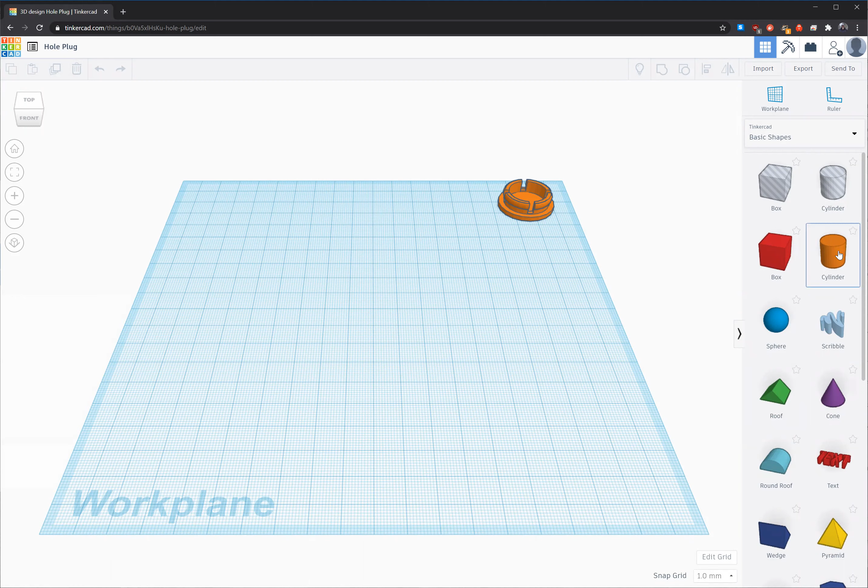Our hole plug is going to be 7/8 of an inch, so we're going to make the top of it a little bit larger, about 27 millimeters. Then the base is going to be about 2 millimeters thick. Since this is the only thing touching the build plate, we're going to move our work plane up to make it a little easier.

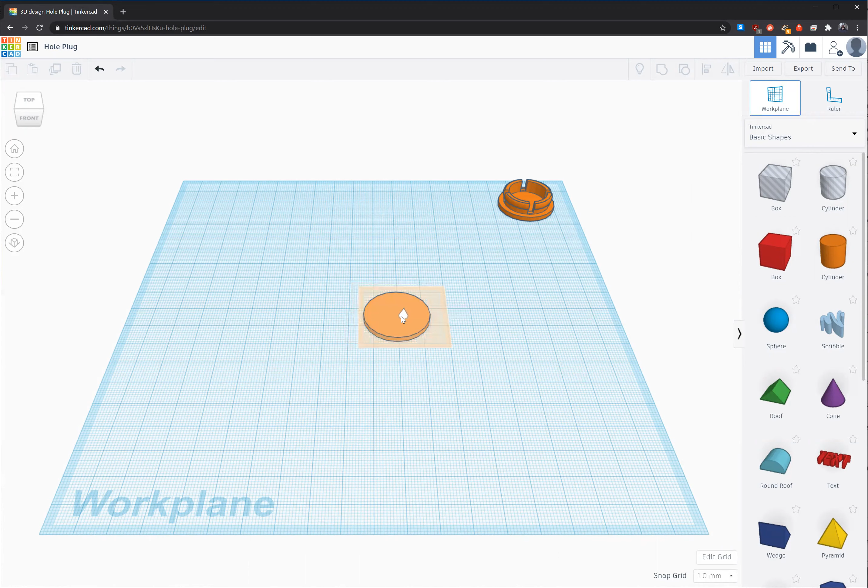The next cylinder, and then we're also going to do a top-down flat view. Zoom in there. The other thing we can do here is make the sides nice and smooth.

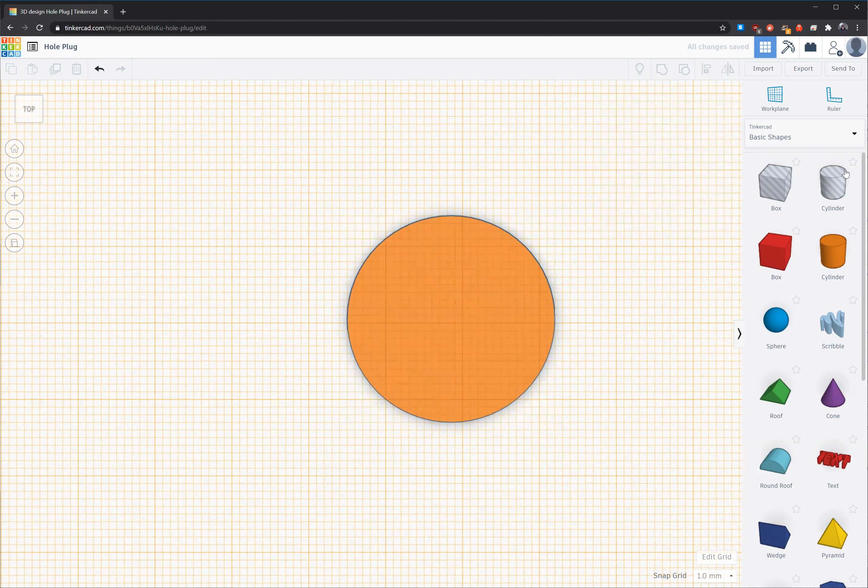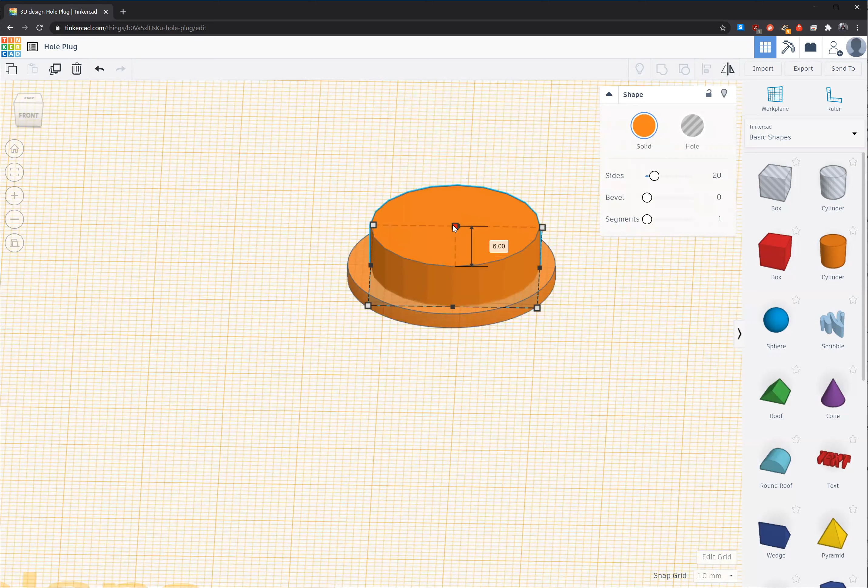Next thing we're going to do on our work plane is the next cylinder. Put it on there, we'll line it up in a minute. This is going to be just a little bit smaller, 22 millimeters. If we want to look at it, make it about 6 millimeters tall. We'll go back to the top and line it up.

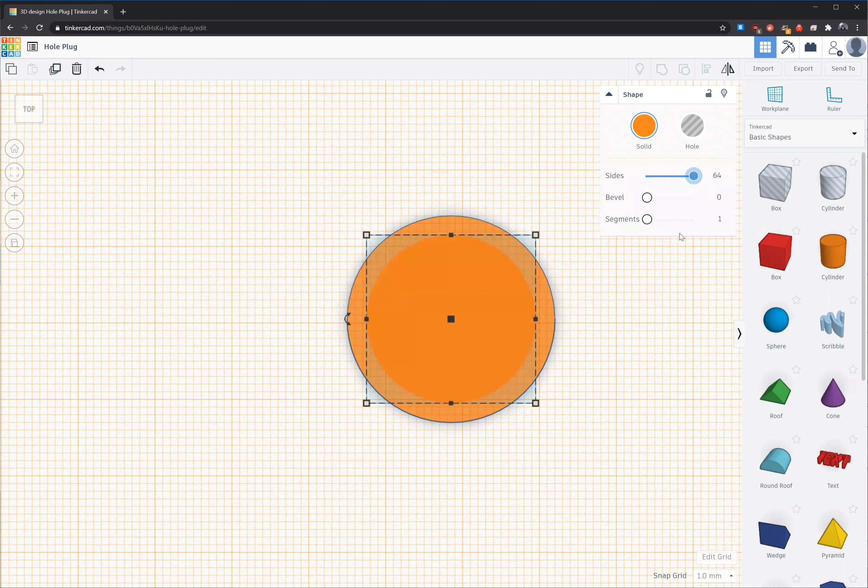Select all, line. I'll make that one smooth also. We need to make that second one hollow, so we'll do that with this cylinder. Get it up again, make it smooth.

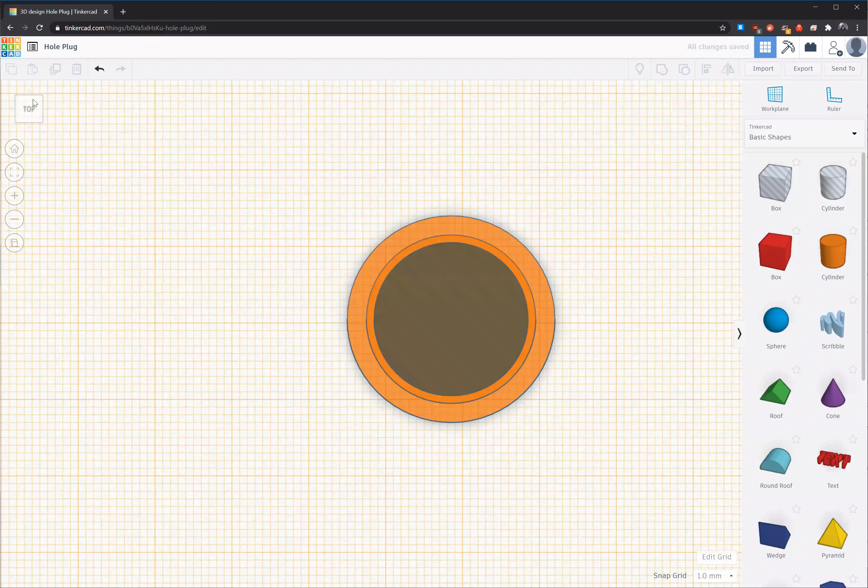Select all and align. Let's take a look at what we got. We can actually shorten that up, but it doesn't really matter because we're going to join them right now. So that's the general shape, we got that together. We're going to select all now, and we're going to join.

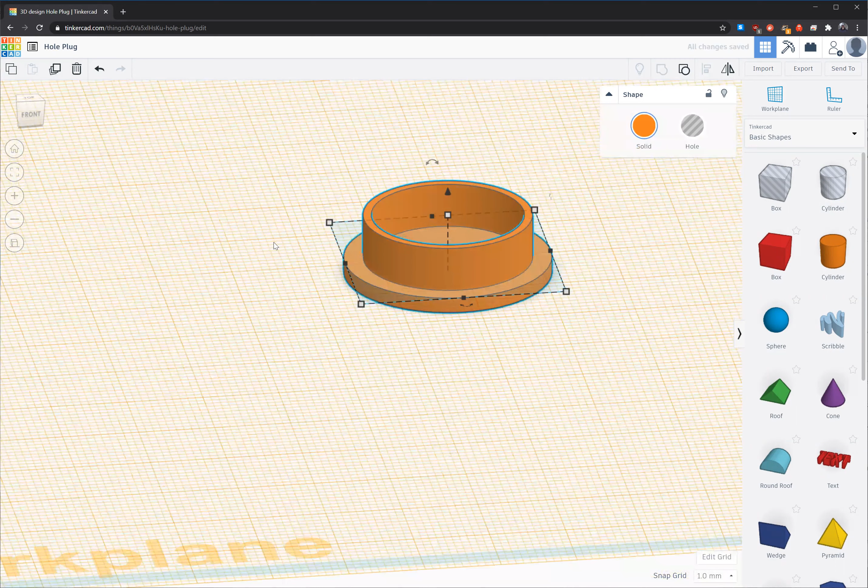So it's starting to look like a hole plug, but we do need a lip on top so that we can make it pop in the hole. So we're going to use this ring.

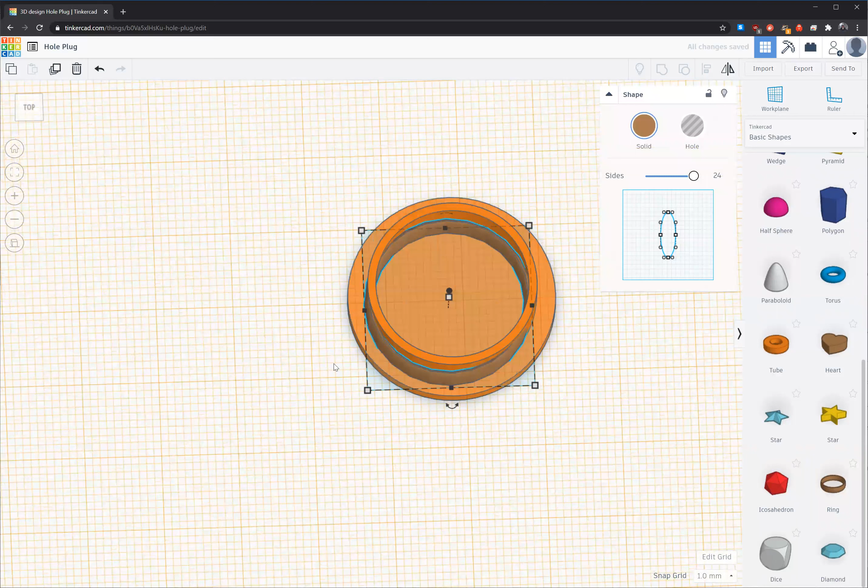Again, we'll align everything first just to make it easier to see. And we want to move that ring up—actually, we want to make the ring a little bit bigger. We hit Control and Shift, and make it really big so we can see it.

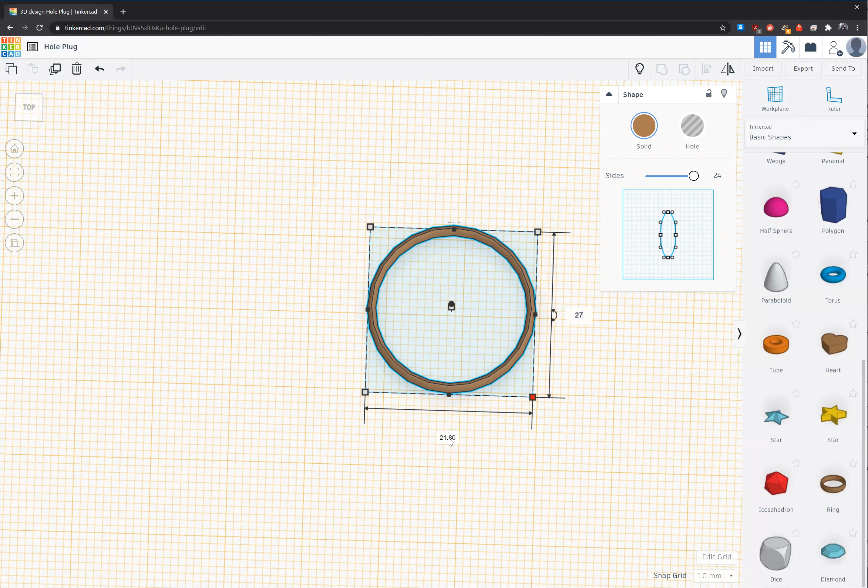What I did was hide the other piece to make it easier to see that ring, and then we're going to unhide that. Okay, so let's look at where we want it vertically.

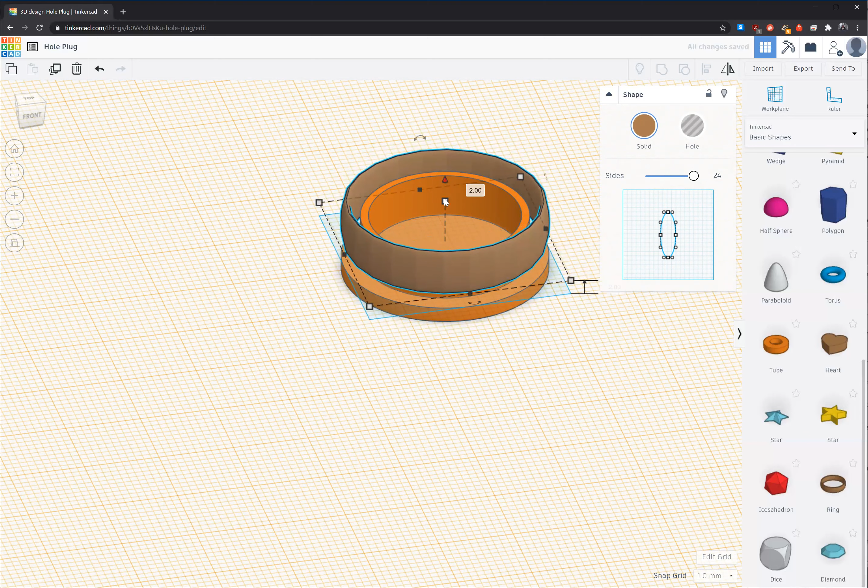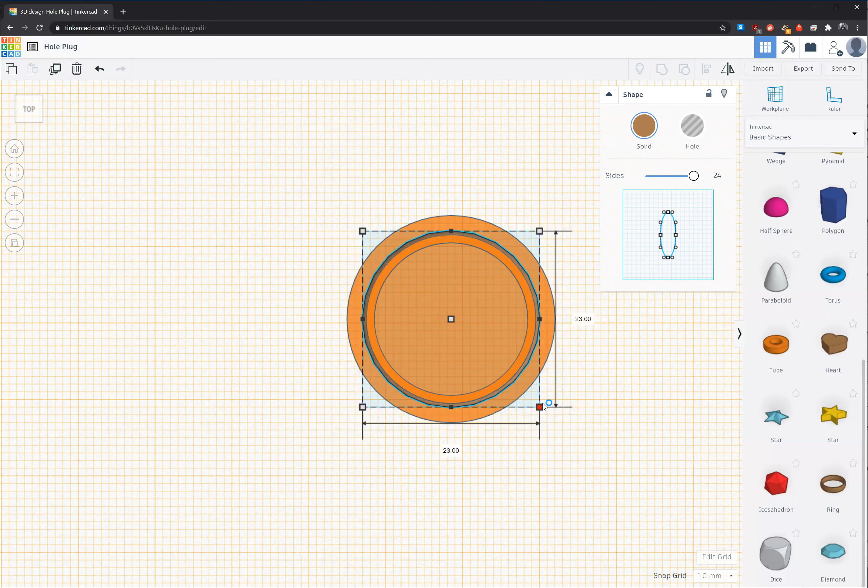Now, when we resize this ring, we want to just kind of do it visually. We're going to hold Control or Alt and Shift so that this ring resizes around the center. There we go. Looks like we need to go up a little bit.

This triangle here, we'll lift it. Since we're at a 1 millimeter grid, we're going to go to 0.1 millimeters so we can get a little bit more fine tuning here. Okay, that looks pretty good.

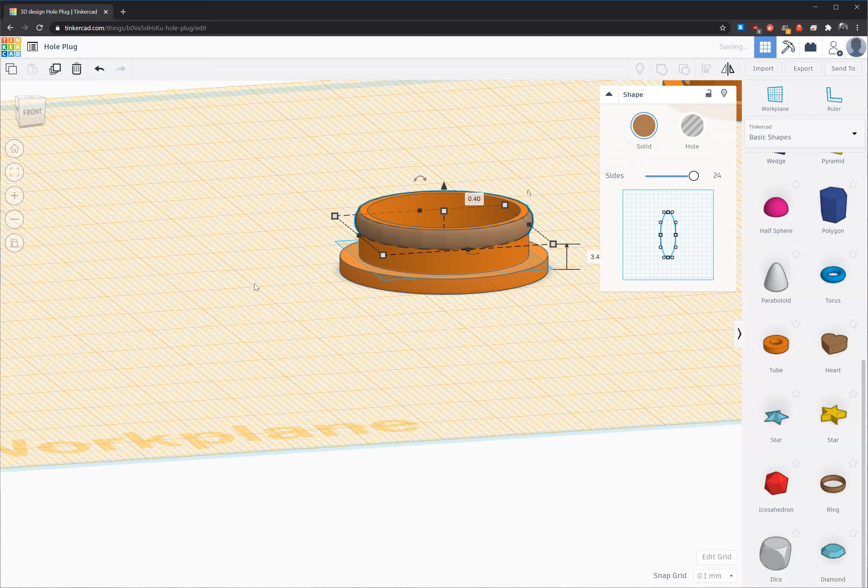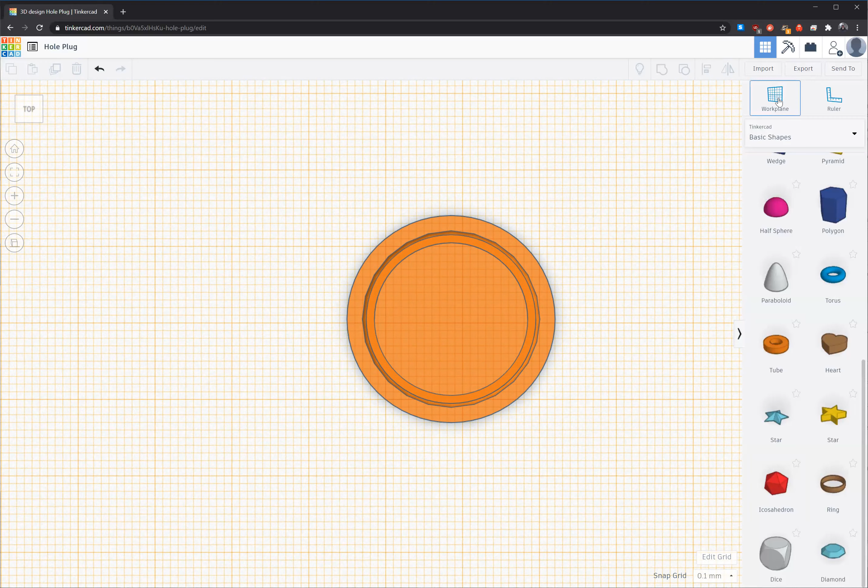We'll join that one just for things easier. Now our work plane is still on the top of this lower disc here, so in order to make this easier to lock into a hole, we're going to make a couple of cuts in it.

We do that with a box hole. I'm going to do it over here just to make it a little easier to see, and we'll do about 2mm cuts.

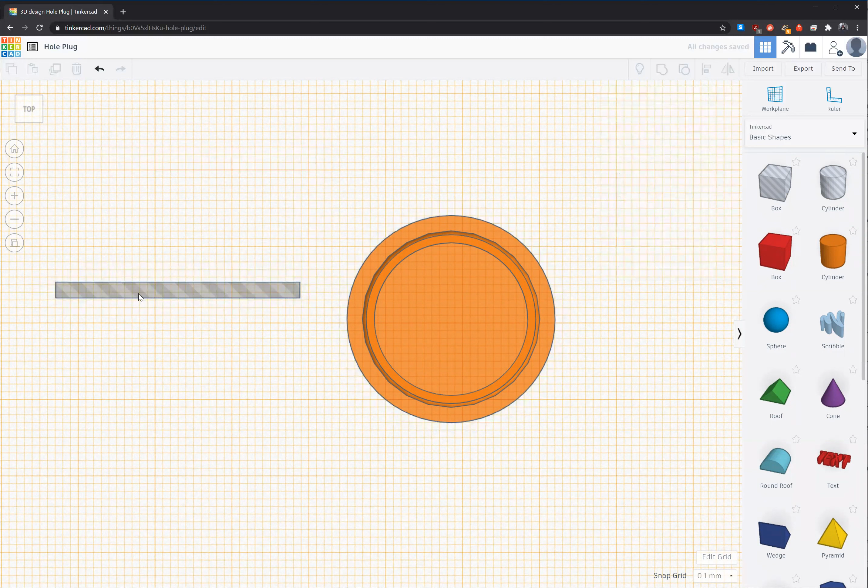I'm going to do Control D to duplicate this one, and then on the duplicate, we're going to rotate that. Shift, select both of these, and we'll combine them. Move them over.

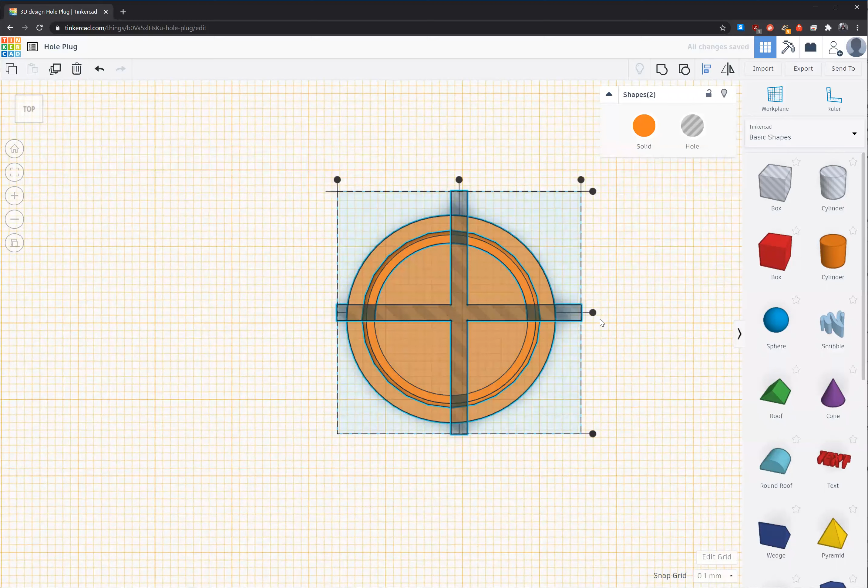You get pretty close, and then use the alignment tool. Now, if we join these together right now, we're going to have a little bit of a cutout in the disk, and we don't necessarily want that. So let's go and pull it up just a little bit. That should work.

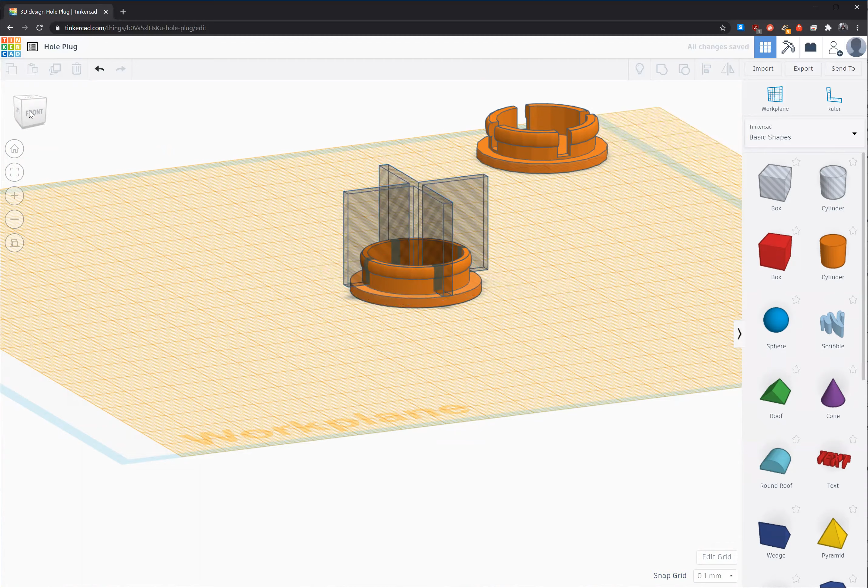All right, let's look at what we have here. Let's select and join everything together and see what it looks like. Let's zoom out, and we'll get rid of our work plane because we don't need that anymore. Just pop on the bottom.

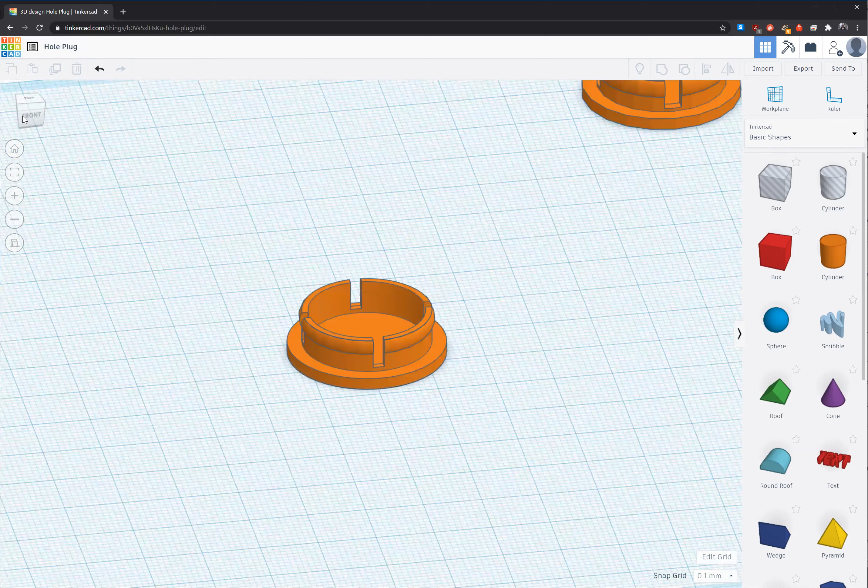And there is our hole plug, 7/8 inch. Obviously, you can use this for any size hole plug. You can adjust the different parameters like the ridge here and the overall disk size. You can flip it over and do some carve outs or domes on the bottom, but that's the quickest way to get to a hole plug.